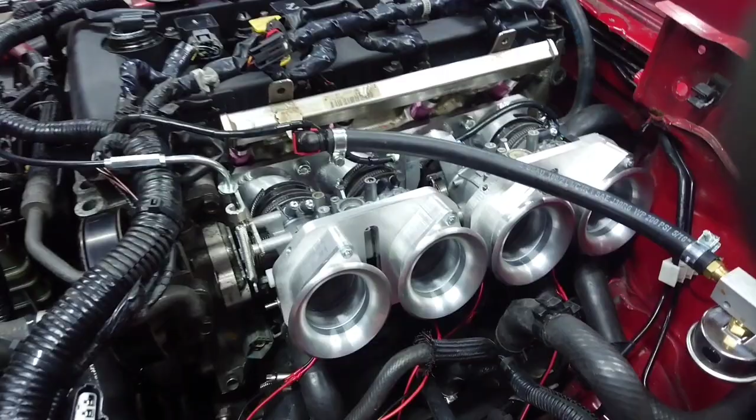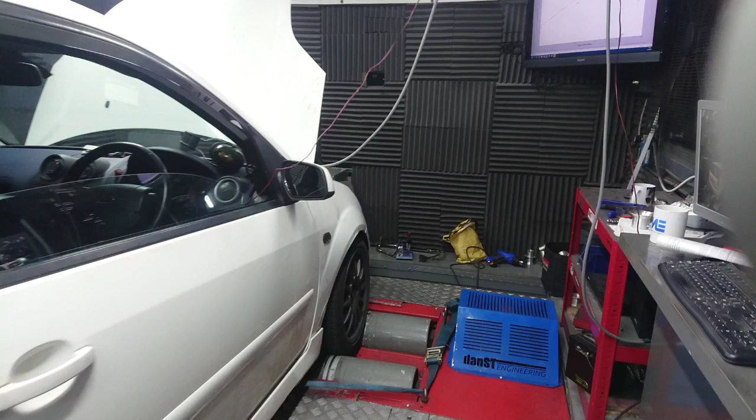This car is our own, previously on the dyno with the 2.5 fitted, as you'll have seen in our other video. It did a little over 200 brake horsepower and a bit over 200 foot-pound of torque. Since then we've decided to go further with the engine.

We've now fitted a set of Esslinger Stage 2 cams and an AL Developments cylinder head. We sent the head off to Andrew at AL Developments, who's done a fantastic job of porting it, and fitted the Stage 2 Esslinger cams we got from the States. Strictly speaking it probably didn't need the head work, but we had the head here anyway, intended for another engine we've not yet built, so we thought we may as well fit it and see what it does. We've also still got the 50mm throttle bodies that were on there previously.

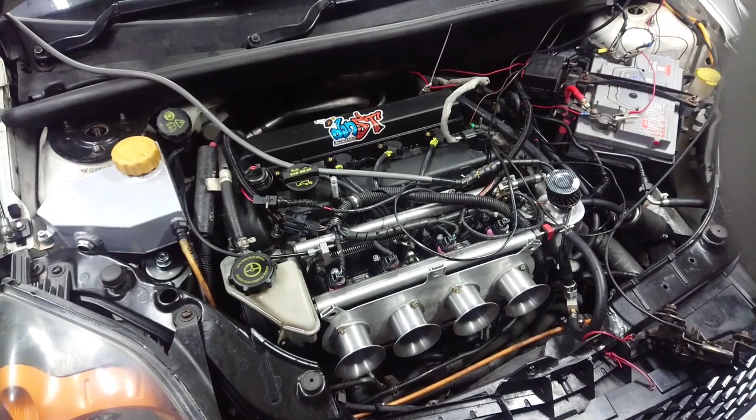So that's Esslinger Stage 2 cams and an AL Developments head on a 2.5 Ford Duratec. Should make for a lively little thing.

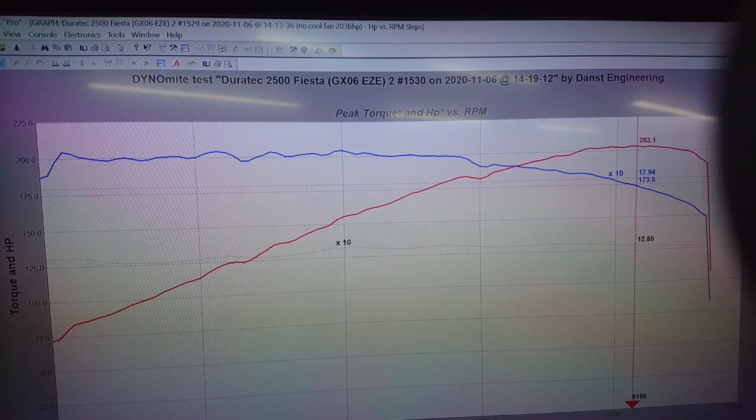So there's the graph from previously - lovely torque and 203 horsepower at the top, peaking a bit over 6,000 RPM.

So today we're going to do a bit of mapping. We've got the ME221 running it, by Motorsport Electronics, and the VVT controlled still.

We did find a bit of a problem with that - we were unaware that in the VVT line there should be a little diode, which we didn't have because this car was fitted with a very early wire-in loom. Unlike the ST170 looms etc, which have that built in as standard, this didn't. We had all sorts of problems with flyback voltages causing issues with the VVT. We've since fixed that, and it's made the VVT fully stable.

So yeah, we'll crack on and see what we can get.

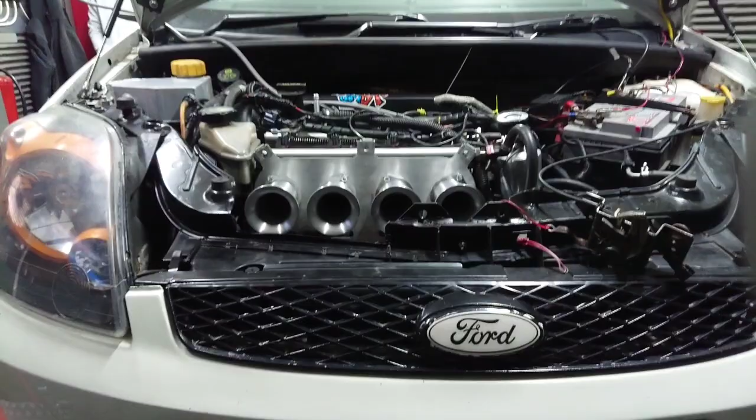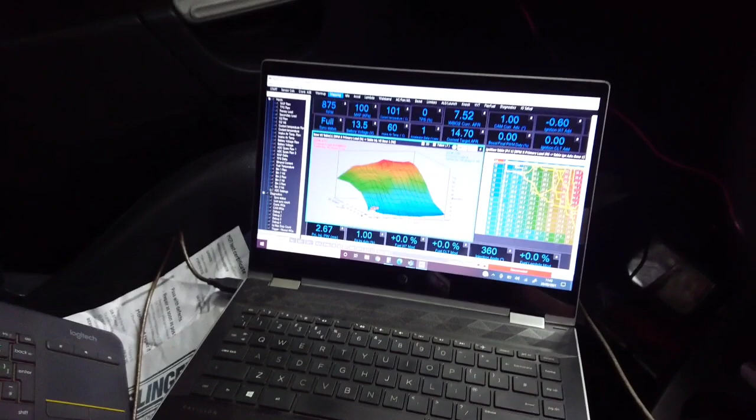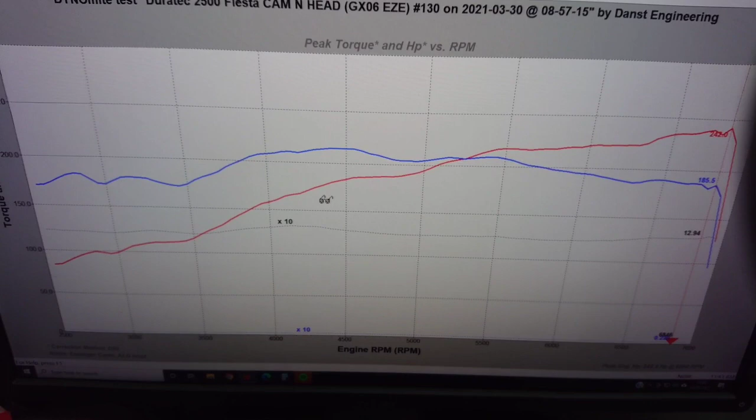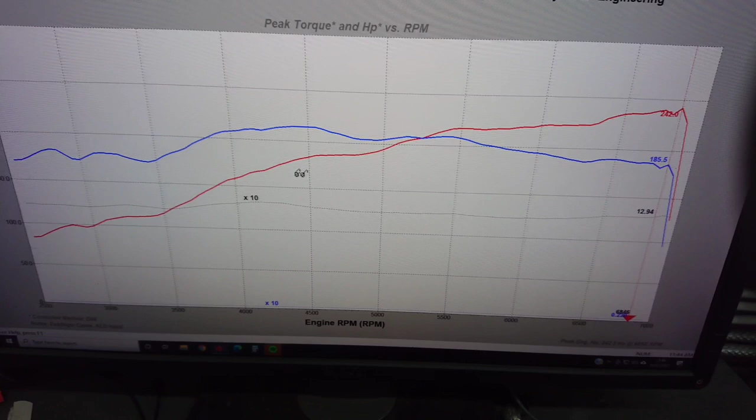We're really happy with that 242 horsepower - that's actually more than I was expecting. So that's 242 horsepower from a 2.5 running Esslinger Stage 2 cams and an ALD ported cylinder head.

So what we're going to do now, just out of interest, is put a set of 90mm trumpets on there. We've currently got 50s on, and we'll see if we can increase that low down torque.

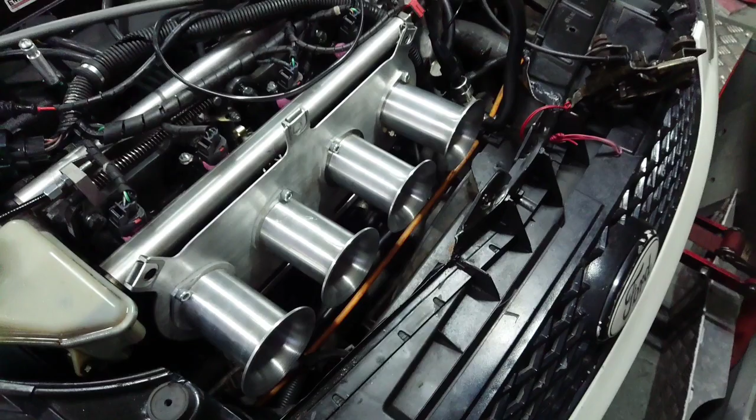So there we've got a set of 90mm trumpets fitted now, a little bit tight. We'll have to do some front panel modifications if we go with that - I've had to remove the bonnet catch just to give clearance to that far trumpet, but it would work with a little bit of work, some bonnet pins rather than a bonnet catch, and a bigger filter. So we've done a few runs.

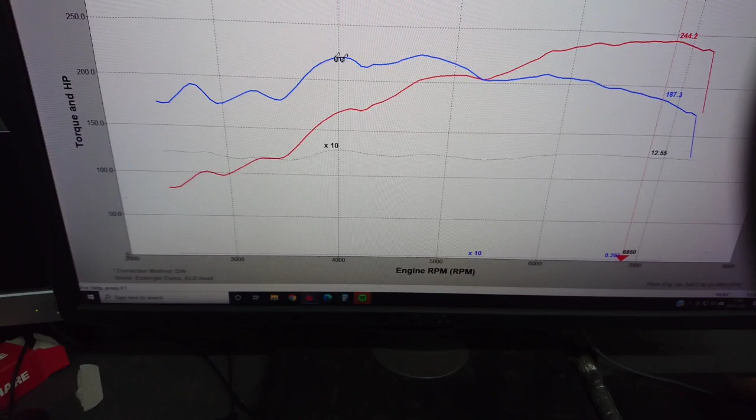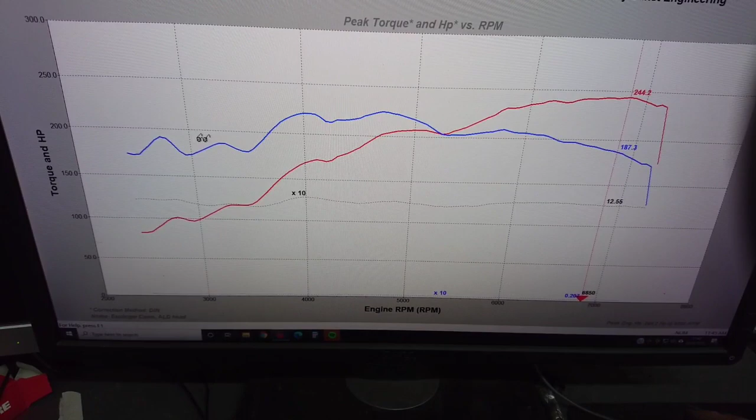Good morning. We're down here on a Saturday morning doing a bit of work on the MK, the 2.5 MK Indy that we've got as our own little track car. But I wanted to do a video update on the Fiesta that we recently dynoed, which you've just watched the dyno video of.

It's been on the road for a couple of weeks now, but I discovered we still had a bit of an issue with the VVT dropping out. That car had a wire-in loom from many years ago, and it just seemed like we had a lot of electrical noise. Luckily we've developed, with Motorsport Electronics, a plug-and-play Duratec loom.

I'm doing a separate video on that loom which you'll be able to see shortly - it's basically a fully terminated loom for the Duratec. Because I was having issues with the VVT dropping out on that car, whereas the MK had no issues at all, I decided to swap the loom out and put the proper Duratec loom in, and that really did transform the car again.

It smoothed things out and made it much nicer to drive, but consequently the VVT offset wasn't quite right, so I've had it back on the dyno again, remapped it, and the results show we've gained a little bit more power. So I thought I'd do a bit of an update.

So there's the last run you'd have seen with the 50mm trumpets on the Fiesta, and the thin lines are the new run with the new loom. I was able to optimize the VVT a bit more, and as you can see we've picked up power, especially above 5,000 RPM - we've gained quite a reasonable amount.

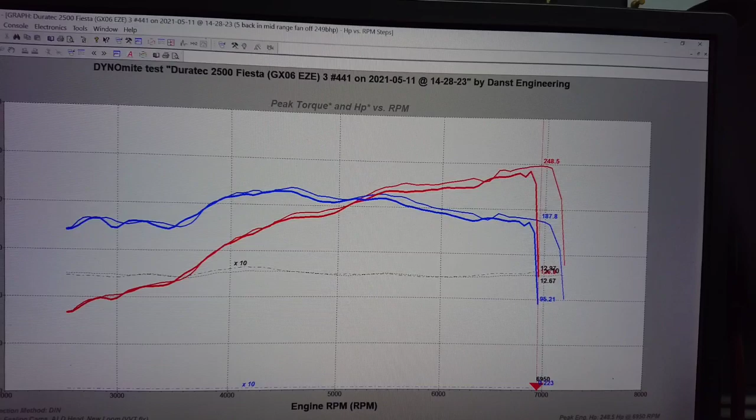So the car is now doing 248 brake horsepower peak on the 50mm trumpets. Where we saw about 240-242 previously, and then 244 with the 90mm trumpets, we've actually exceeded the 90mm trumpets result, still using the 50s. Didn't quite make it to 250, but that's not the end of the world - still a mighty impressive gain.